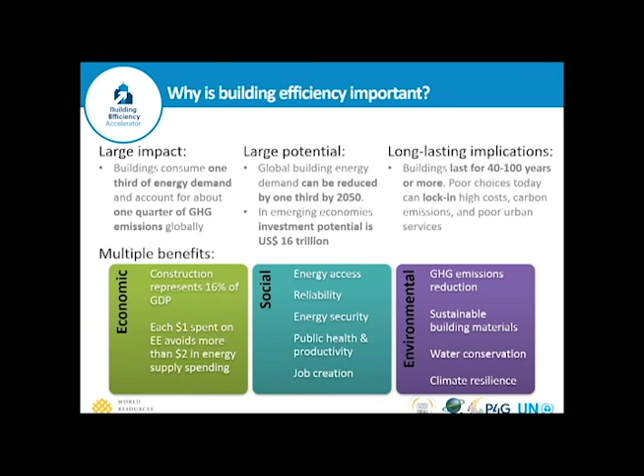When cities sign up with the Building Efficiency Accelerator, they commit to 3 actions in support of our global vision of making all new buildings highly efficient and zero carbon by 2030, and all buildings by 2050. Cities commit to adopting and implementing an enabling policy, to implementing a pilot program, and to tracking and communicating their work and sharing lessons with other cities.

Today, we're going to focus specifically on city actions that relate to energy efficiency targets and improvement programs. This is just a very small sampling of the types of actions that cities might choose, which fall into that category. In Dubai, they recently completed a benchmarking study of 100 buildings, issued scorecards and recommendations to the participants in that program.

Mexico City is launching a private sector energy efficiency challenge program to lead the private sector in the city toward energy efficiency in a voluntary way. And in Nairobi, they're aiming to commence baseline studies on water and energy usage in order to inform their future work on building efficiency.

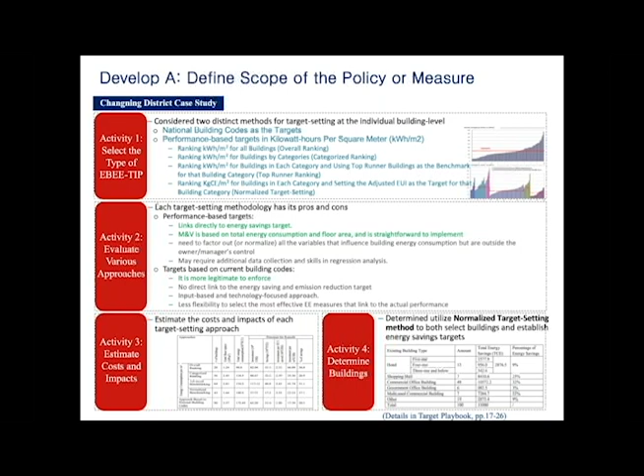Finally, they had to determine on which buildings they would implement their targets and improvement program. They took a very detailed, stepwise analytical approach to identify both the buildings and the type of target setting method to employ. Ultimately, they chose a performance-based target setting methodology using a normalized approach, factoring out variables such as occupancy and operating hours to set equitable targets that could be bought into by various stakeholders. The lower right-hand graphic shows the specific building types and the amount of energy savings that would be achieved by implementing these normalized targets, driving toward their overall goal of 33,000 tons of coal equivalent avoided in the district.

Also, in terms of development, cities will need to think about how to develop locally appropriate policies related to existing building energy efficiency targets and improvement. Questions cities want to ask at this phase include: will there be any incentives or disincentives to motivate buildings to achieve their targets?

If so, what types of incentives, certifications, awards, subsidies, or disincentives, such as higher utility rates? Will there be a technical assistance program for buildings to help them achieve these targets? And if so, what type of technical assistance, training, tools, or experts?

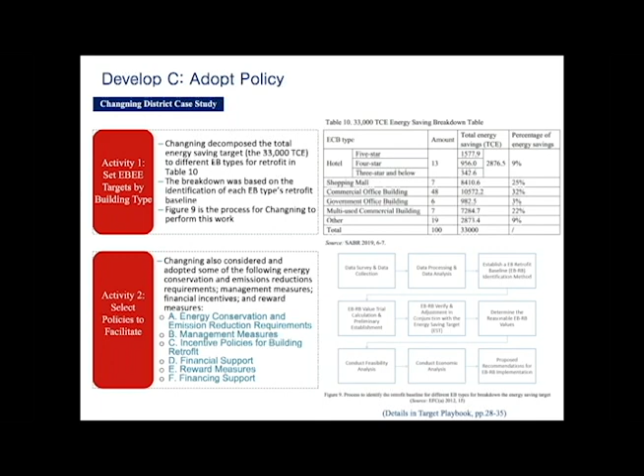The fourth component of the development stage is to create an implementation plan. Questions cities will want to ask are: what will the implementation plan for the Targets and Improvement Program contain? Will there be a time frame for buildings to achieve these targets? And what tools and resources will be necessary?

They also developed a time frame for implementation of their Targets and Improvement Program aspects. Phase 1 would focus on improving energy efficiency in buildings where the actual energy use intensity was higher than the target value, and these buildings also represented the largest energy savings potential that could be achieved, such as through operational improvements or lighting retrofits. Phase 2 would focus on improving energy efficiency where the actual energy use intensity is higher than the target value, but the energy savings that could be achieved would be at a higher cost.

For example, envelope retrofits. Phase 3 would focus on buildings where actual energy use intensity is higher than the target value, but the actual energy potential savings is small.

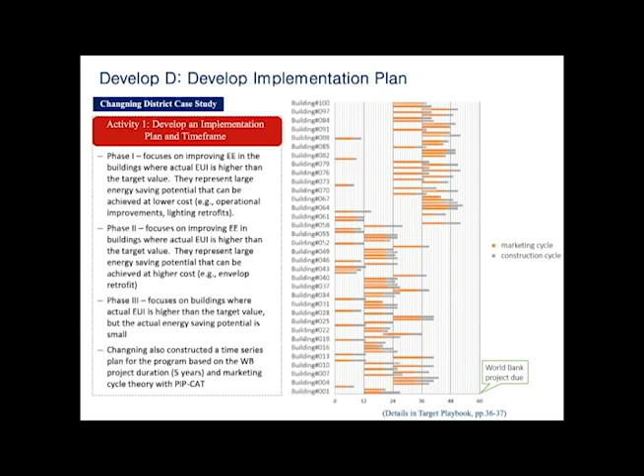That concludes the development section, and now I'm going to focus on implementation. The first component of implementation is implementing the energy savings actions. Questions municipalities will want to answer at this phase include: what are the procedures needed to implement the voluntary energy efficiency targets and improvement program? How will stakeholders participate and interact with one another in this process?

In the case of Changning District, on the left here, you can see that the district did an excellent job during the implementation phase to analyze potential problems and design both specialized and traditional models to address these problems. I'm not going to go into detail here because of time limitations, and also this information is contained in our playbook. But you can see in the diagram on the right that Changning District had a very complex model associated with implementation of energy savings actions involving ESCOs, building owners, the Changning District government, financial institutions, and other government stakeholders.

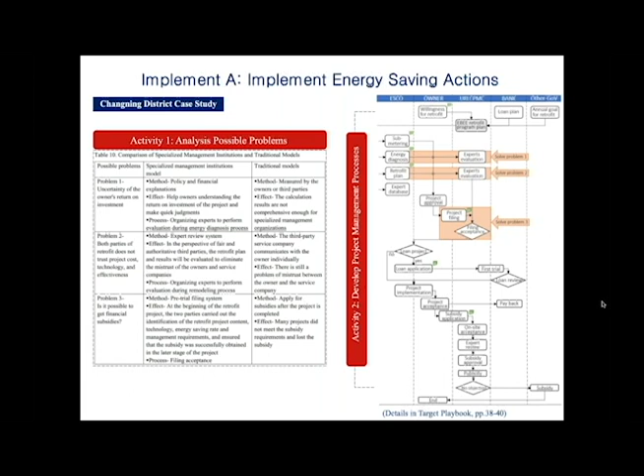And I think Mr. Mao and Jing Ho can answer any questions associated with this management process during their presentation.

Also incorporated into the implementation phase is monitoring progress and making adjustments, taking immediate action to resolve problems that may arise. Questions municipalities will want to ask at this stage include: how will the impact of the existing building energy efficiency targets and improvement program be measured and evaluated? What key performance indicators will be assessed and how often? What outcome indicators will be used to evaluate whether this program is a success or not?

Who will participate in the measurement and verification? What is the level of participation in the voluntary program? Is it sufficient to achieve overall goals? And how do we identify problems as they arise and take corrective actions?

In the case of Changning District, they identified a number of key performance indicators, including the number of buildings implementing energy efficiency measures, total floor area implementing EE measures, energy savings achieved, total carbon dioxide emissions reduced, total subsidies approved to implement energy efficiency measures, and the percentage of the overall target for the district achieved.

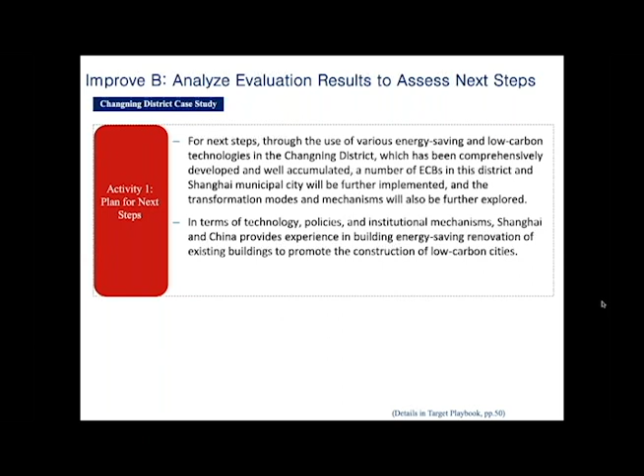Changning District has continued to evaluate the results of its programs and identify next steps. They have sought to increase the number of existing commercial buildings in their district that will participate in these types of existing building energy efficiency targets and improvement programs. They're also continuing to assess technologies, policies, and institutional mechanisms that can be leveraged to further drive energy savings and renovations in their existing buildings.

So I'll conclude with a few tips associated with existing building energy efficiency targets and improvement programs. I think it's very important that not only energy can be considered in these types of targets and improvement programs, but also taking into account opportunities to improve comfort and service levels in buildings. Transferring energy savings into cost savings can help make the business case for building owners and management companies to get involved.

Leveraging opportunities to optimize building functions through renovation processes. In addition, policymakers should ensure that they have support from many relevant authorities. They should consider if subsidies and other incentives could be leveraged from government, either central or local, and strategies to persuade ESCOs and other stakeholders to get involved.

On the data side, we can't stress enough how important this is. Data is really at the core of an existing building energy efficiency targets and improvement program. And while Changning District had access to a very sophisticated energy consumption monitoring platform, that's not a requirement. The Building Efficiency Accelerator and Lawrence Berkeley National Lab have online free software tools that can support cities in collecting and analyzing data.

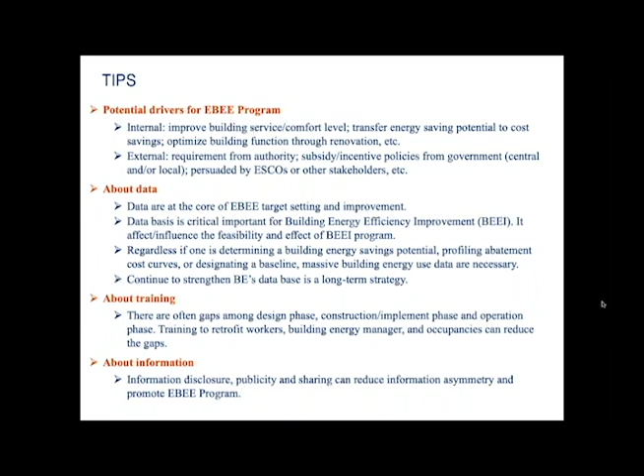Also, it's important to publicize and share findings that not only connects you to a network, but it also allows you to share lessons, gain new insights, and really to benefit other cities that may be looking to do what you're doing. So that's all for today, and I look forward to hearing from Mr. Mao and Jing Ho with more information on Changning District's activities.

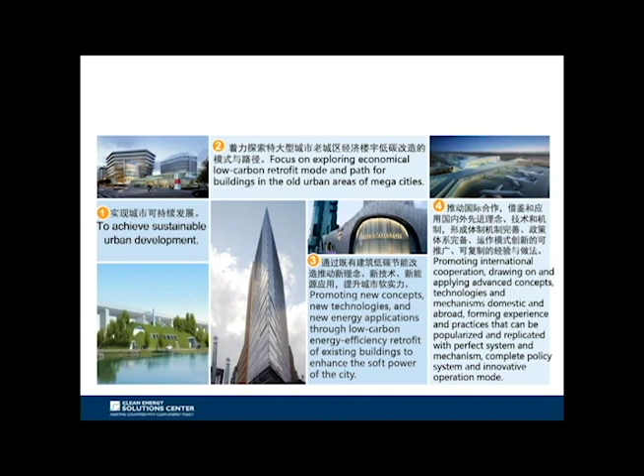From 2012 to 2018, Changning completed 45 existing building energy efficiency retrofit projects in the district, with a total floor area of 2.4 million square meters, achieving an annual energy saving of about 30,000 tons of standard coal.

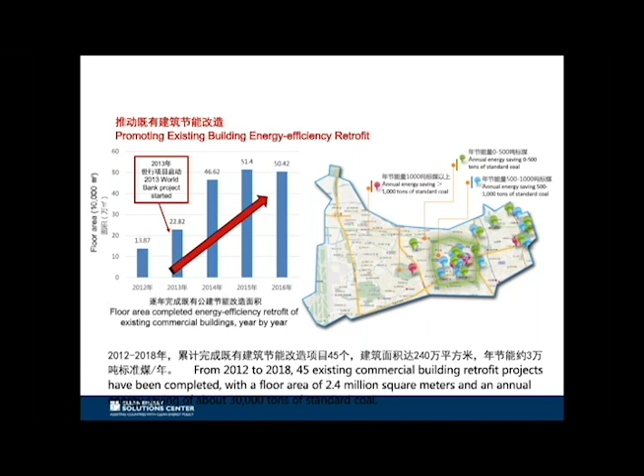This page shows that through the implementation process over the years, the concept of building energy efficiency improvement has gradually been changing.

At the beginning of the World Bank project in 2013, the main path to improve existing building energy efficiency and reduce energy consumption of large existing buildings was improving the energy efficiency of equipment and facilities.

To be specific, this meant implementing retrofit and replacement of the main facilities and equipment in the building.

But after some time of retrofitting, Changning District realized that the equipment and facilities of many existing buildings had not yet reached their service life, making simple equipment replacement less cost-effective. As a result, many building owners became reluctant to carry out retrofits.

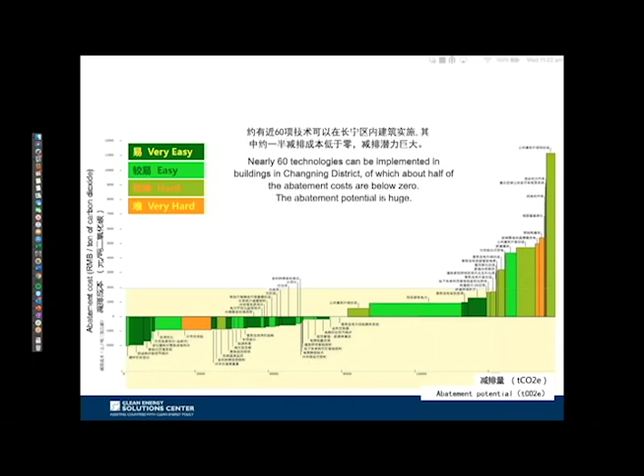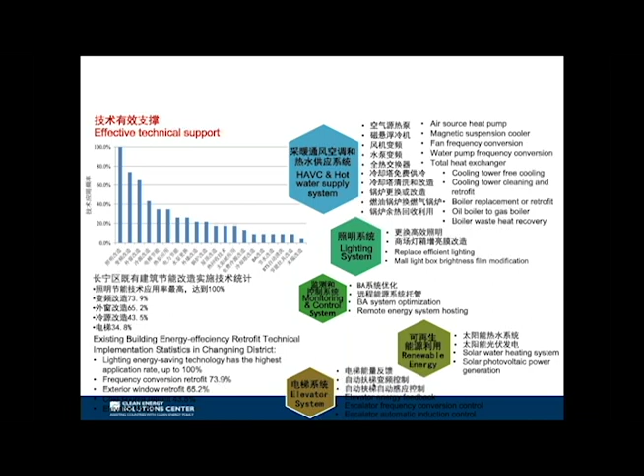This slide lists all the technologies we implemented over the 5-year process of the World Bank project, along with their frequency of use. Next page, please.

This page mainly introduces the usage scenarios of building commissioning in Changning District. The first is that commissioning is an independent consulting service, exactly the same as the business model of building commissioning in the US.

The second scenario is a model based on EMC, which is equal to the ESCO model. Under the EMC model, the building owner and the service provider focus more in the contract on the cost of equipment replacement, and they use energy savings as the basis for payment.

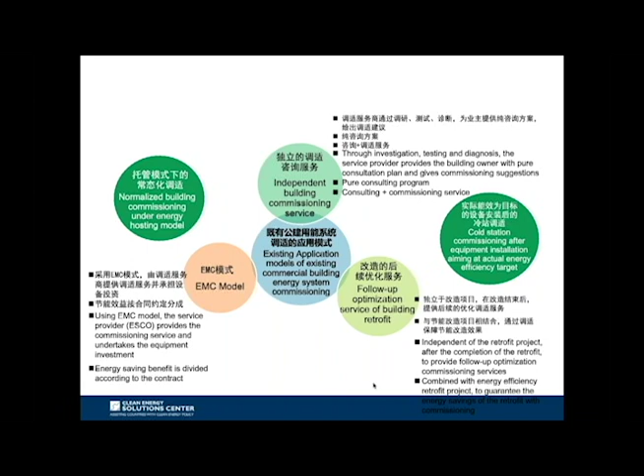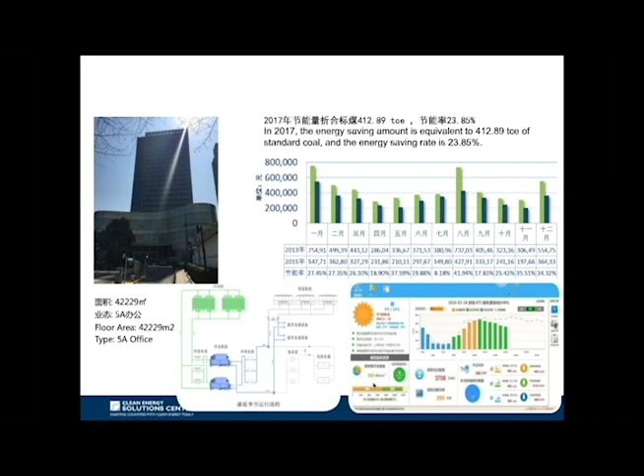The lower two figures show a display of the BA system. Okay, next page.